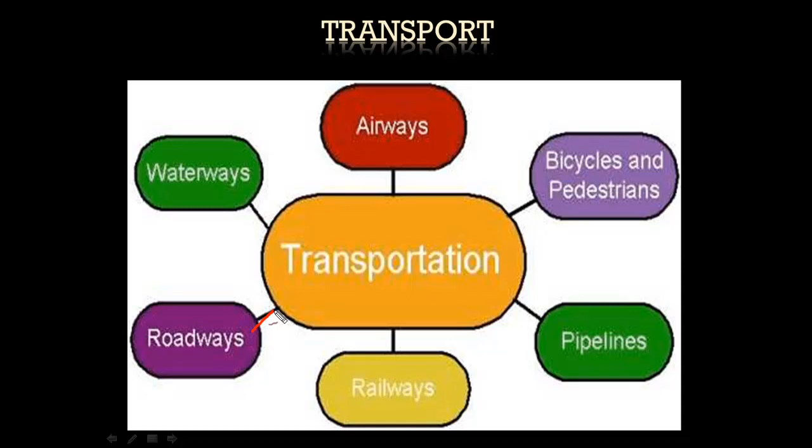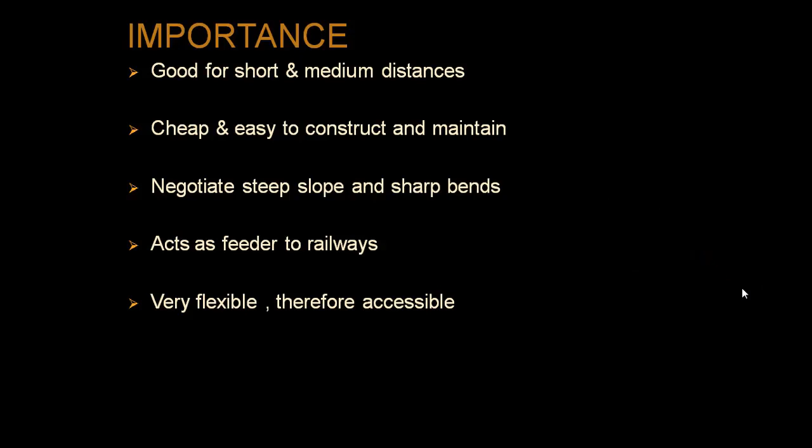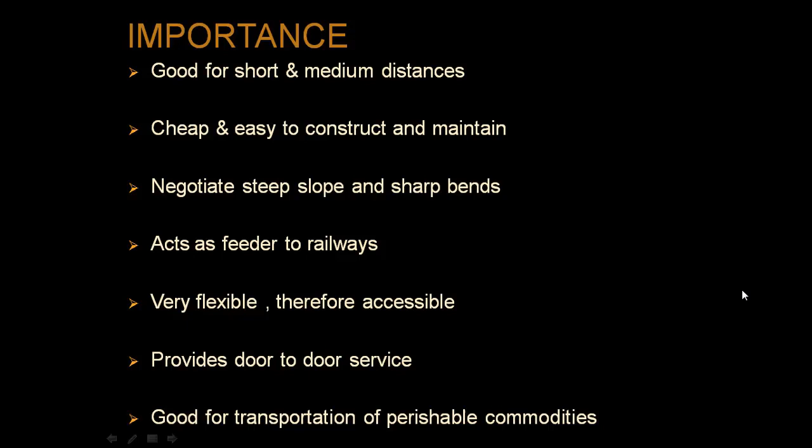Now we'll see the importance of road transport in India. It is good for short and medium distance, cheap and easy to construct and maintain. It is very negotiable at steep slopes and sharp bends, meaning construction of roads in the hilly region is with hairpin routes, and this type of construction is possible in hilly regions. It acts as a feeder to railways, as all the road networks in India mainly connect the major railway stations. It is very flexible, therefore very accessible, providing door-to-door services, and it is good for transportation of perishable commodities. So these are some of the important features of road transportation in India.

Let's see the status of expressways in India. They ensure swift and smooth travel. These are 6-lane highways mainly divided by a wide divider. No slow-moving vehicles are allowed on these expressways, and the speed limit should be more than 120 km per hour. These roads are called toll roads.

Now we'll know about the important expressways in India. These are some of the very famous ones: Mumbai-Pune Expressway, Kolkata-Durgapur Expressway, Ahmedabad-Vadodara, Kolkata-Mumbai, Delhi-Gurgaon, Noida-Greater Noida, and Delhi-Noida Direct Flyover Expressway. Among all these, the Kolkata-Mumbai Expressway is one of the very revolutionary projects that connects the East Coast to the West Coast of India.

Now we'll see the role of BRO, Border Roads Organization. They are mainly involved in the construction of roads, mainly at the borders. These roads play a very important role in the transportation of goods to the hilly region, such as Zojila, Kargil and Manali-Leh Highway, and Pathankot-Jammu-Kashmir Highway. These roads have been constructed by these special forces, who also take care of maintenance throughout the year.

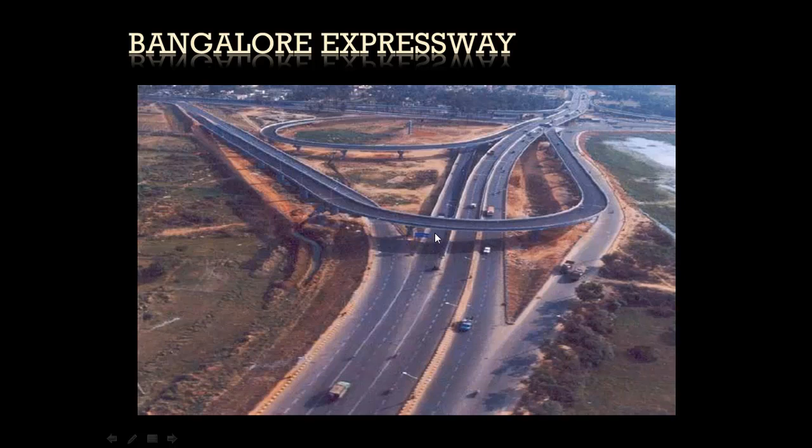All national highways in India are mainly constructed and maintained by CPWD. The primary objective of CPWD is to connect state capitals, big cities and important ports of India. National highways are the chief mode of transportation throughout the country, and 2% of all roads are national highways, but they carry 45% of traffic in India.

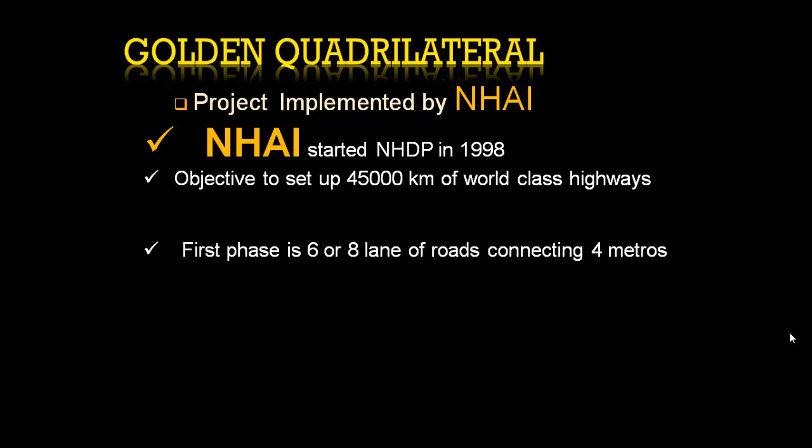Now we'll know about one of the revolutionary road projects taken by the central government in India, called the Golden Quadrilateral. This project was implemented by NHAI, the National Highway Authority of India. It was started in 1998 and is being taken further by NHDP. The objective is to set up 45,000 km of world-class highways, and NHDP is to cost 2,25,000 crores of rupees. NHDP implements this project in phases. The first phase is 6 to 8 lane roads connecting 4 metro cities in India.

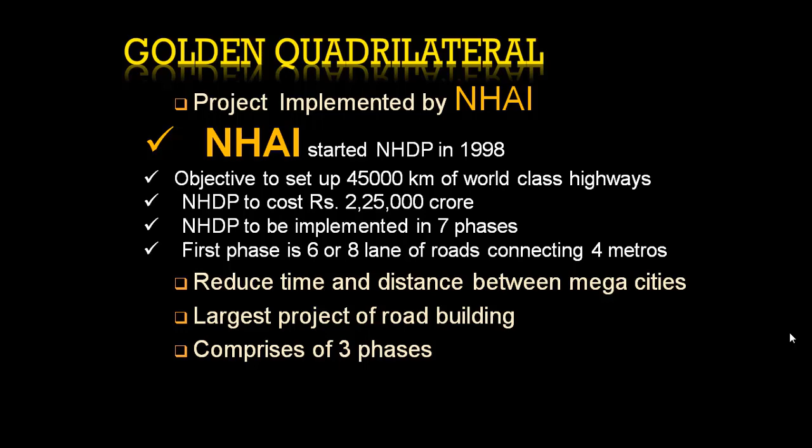What are the other objectives and key features of this Golden Quadrilateral? It reduces the time and distance between mega cities. It is the largest road building project in India, comprising 3 phases. Other important features: it connects 4 metro cities, only national highways are covered, it passes through 13 states, will benefit 66 important cities in India, and the total cost is 30,000 crores.

Now we'll see the current status of GQ in India - route, length and status of completion. Delhi-Kolkata, Chennai-Mumbai and Chennai-Kolkata are more or less more than 90% completed or near 100%. Delhi-Mumbai has already been completed, about 100%. The total length of this GQ is 5,846 km.

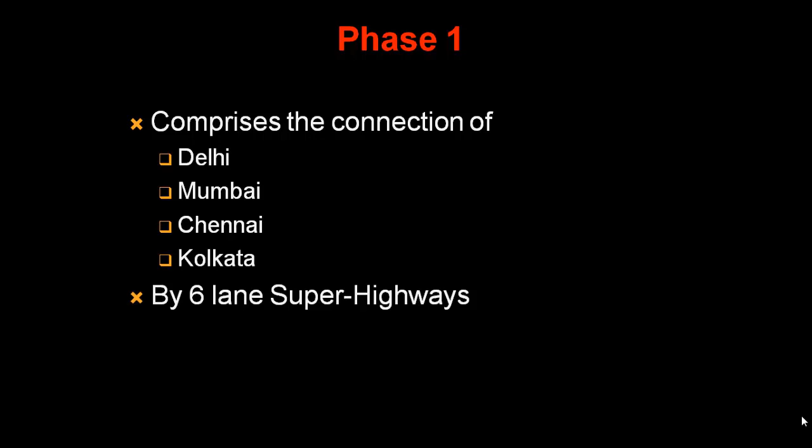Now we'll see the status of national highways in India, phase 1. It mainly comprises connecting 4 metro cities - Delhi, Mumbai, Chennai and Kolkata - by 6-lane super highways. Length is 5,846 kilometers. Phase 2 is one of the very revolutionary projects - the North-South corridor, Srinagar to Kanyakumari, to connect via road, and the East-West corridor, Silchar Assam to Porbandar Gujarat.

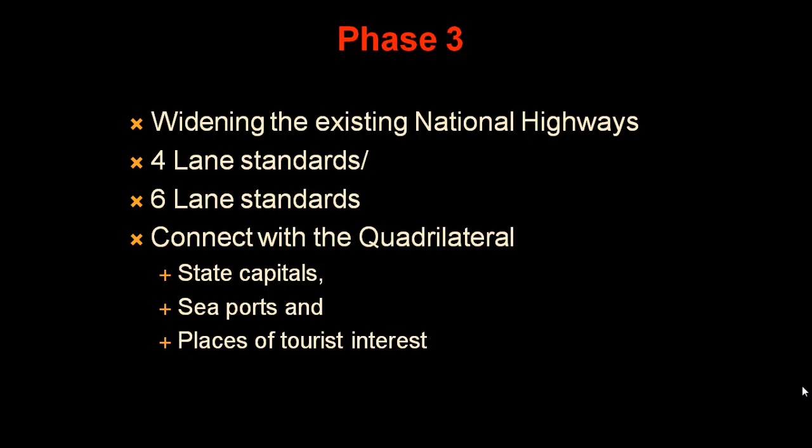National Highway phase 3 status - what are the objectives? Widening the existing national highways from 4-lane standard to 6-lane standards, connecting with the quadrilateral, state capitals, seaports and places of tourist interest. What are the economic benefits of GQ?

Better and faster transport between major cities and ports of India results in benefit to industries, trade, business, agriculture, and employment. It also leads to increased demand for labor, cement, steel and construction material.

Now we'll see in which part of India the national highways are more dense - it is in the northern plains. This is due to the fertile soil and flat terrain, which is very easy for construction of highways, and the high density of population primarily in northern India.

The national highways are very sparse and scattered in the northeastern plains due to difficult land surface. There are swift streams in the hilly region that damage the roads, thick forests, and a backward economy. Construction of bridges is necessary in the northeastern part and is a very difficult task. These are some of the factors and reasons behind the density of the road network in India.

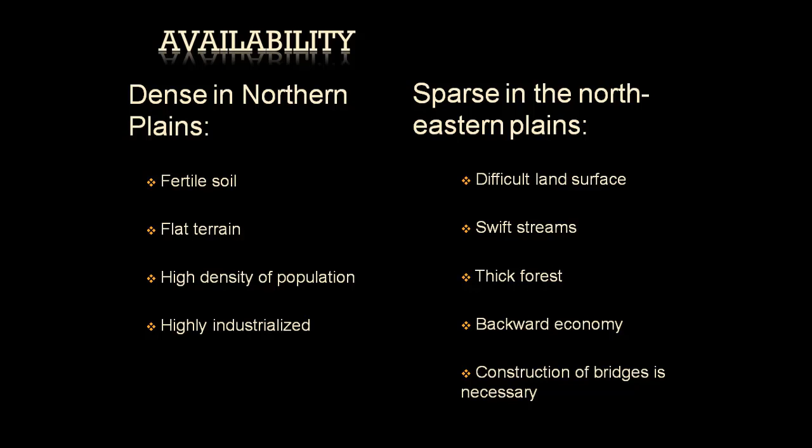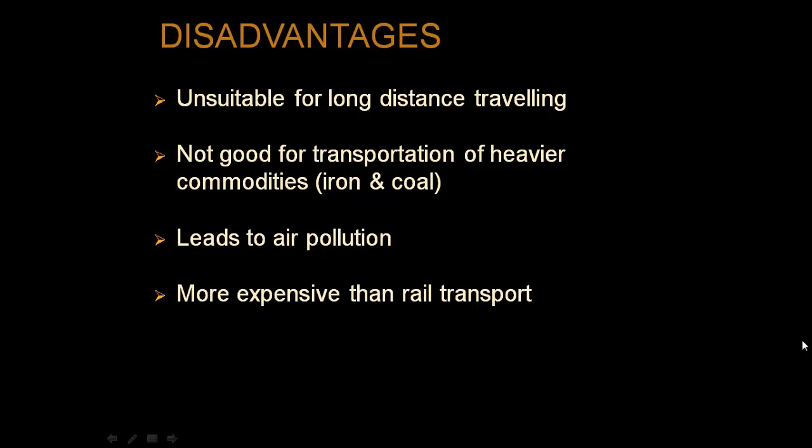What are the disadvantages? Unsuitable for long distance traveling, not good for transportation of heavier commodities like iron and coal, it leads to air pollution and is more expensive than rail transport. Traffic jams are frequent in metropolitan cities. One of the major disadvantages of road transport is the lack of roadside amenities.

Now we'll know in detail about the railways of India. Railways play a very important role in the economic development of our country. As you know, railways are the backbone of any nation, and it is also the backbone for our country.

Indian Railway - the history of Indian Railways dates from 1853. It was first started by the Britishers in India. Railways are the lifeline of inland transport.

It brings economic prosperity and promotes national integration. It was started between Mumbai to Thane in 1853. It is more dense over northern plains and very few railways in the floodplains, Himalayas, plateau region and desert. It is managed by the largest employer under central government.

Distribution of railway network in India: more dense in Gangetic plain, medium in plateau region, and less in hilly and desert areas. Some interesting facts about Indian Railways.

Largest network in the world, 63,273 km in length. Daily 14,000 trains and 11 million passengers commute. 7,500 railway stations exist in India. 7,800 locomotives are there, 40,000 coaches, and 3,26,000 wagons. It employs 1.6 million people, the largest employer in the world.

Now we'll see the types of railways in India. It is mainly categorized on the basis of the distance between two rails: broad gauge, meter gauge and narrow gauge.

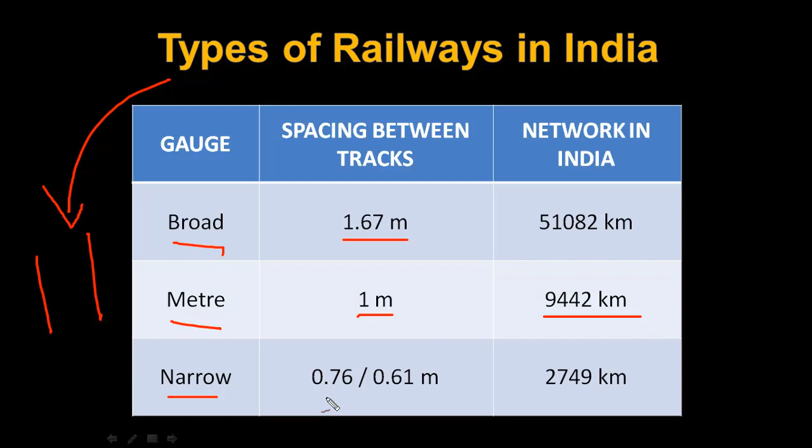Broad gauge: the distance is 1.67 meter, 51,082 km in length. Meter gauge: the distance is 1 meter, about 9,442 km in length. And narrow gauge: 0.76 and 0.61 meter, 2,749 km in length.

Comparison of the 3 gauges: Meter gauge connects major cities to smaller towns, mostly run by diesel engines. Broad gauge connects all the major cities and ports of India, mostly electric engines and some diesel. Narrow gauge connects places in the hilly region, many hill stations, and is mainly run by coal or diesel.

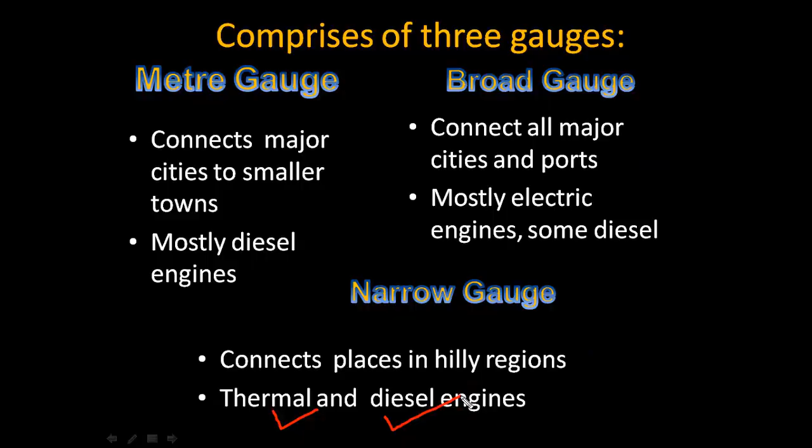Now we'll look upon the 3 gauges in detail, mainly what hasn't been discussed in the previous slide.

Broad gauge comprises 70% of railways in India. It was installed to connect the major ports and facilitates export of raw material.

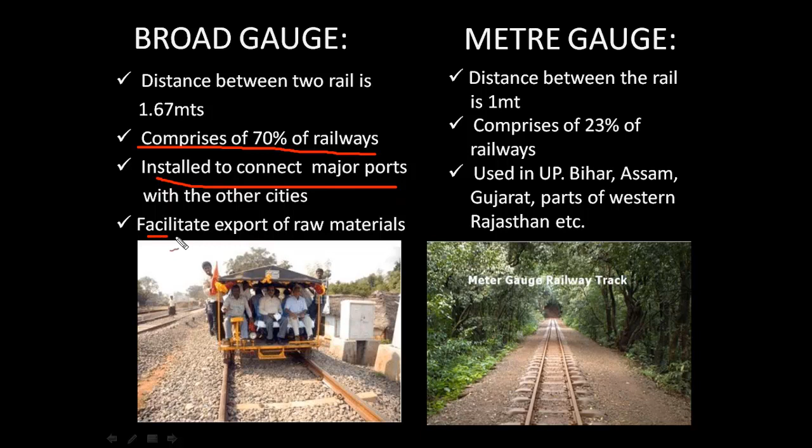Meter gauge comprises 23% of railways in India, used in UP, Bihar, Assam, Gujarat and parts of western Rajasthan.

Now we'll see some advancement in railway network since independence in India. All gauges converted to broad gauge.

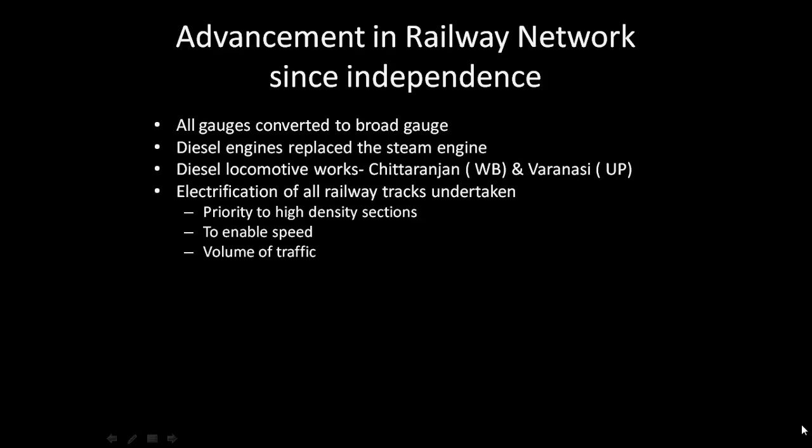Diesel engines replaced the steam engines, and diesel locomotive works are mainly confined to Chittaranjan, West Bengal and Varanasi, UP. Electrification of all railway tracks is undertaken, given priority to the high density sections of India to enable speed and volume of traffic. Electric engines run with greater speed and cause less pollution.

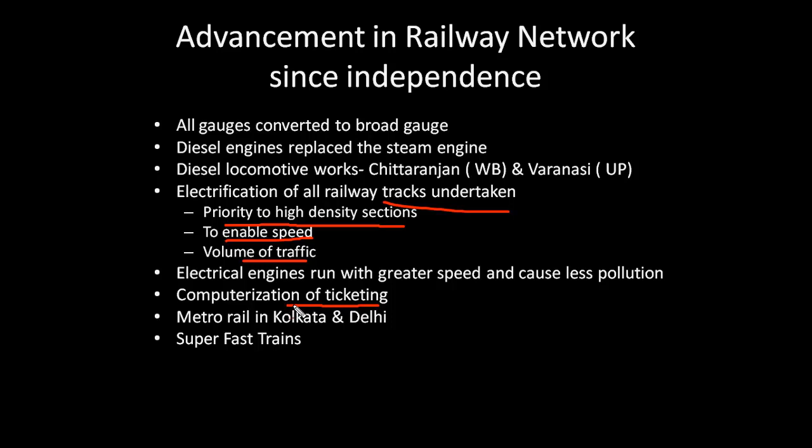Computerization of ticketing is one of the new technologies. More superfast trains have been started in India. This is a very good example of the feeder railway system for commuters in India.

It was first started in Kolkata in the 80s. This is called metro trains, which run on elevated tracks. Recently in Kolkata, a tunnel-based metro rail has been completed that goes beneath the Hooghly River, connecting Howrah and Kolkata main city.